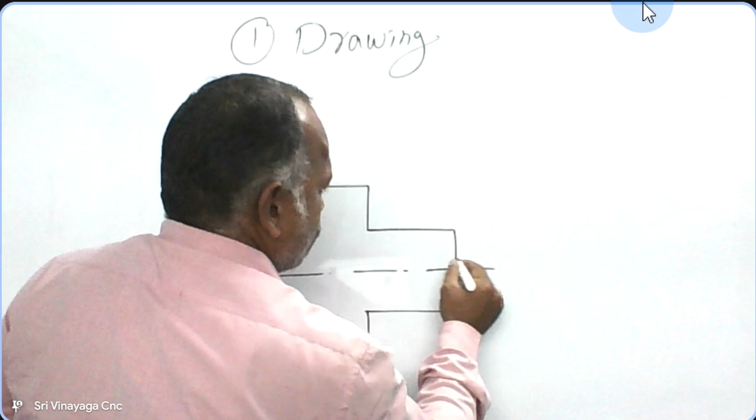Yes. Okay. Mhm. Like this.

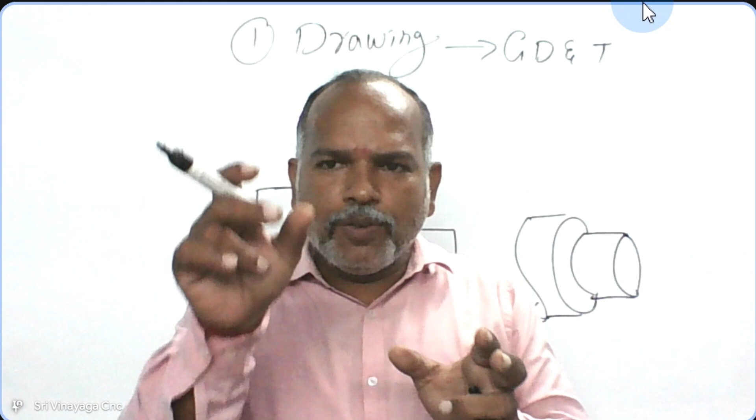Now, G, D, and T. G indicates geometry. Geometry means this lines, this is known as G. Geometrical lines, you'll be using in schooling times, you'll be saying geometrical box. For drawing, you'll be having some instruments, scale, pencil, everything - that is known as geometrical box. G indicates geometry, geometry means this lines is known as geometry.

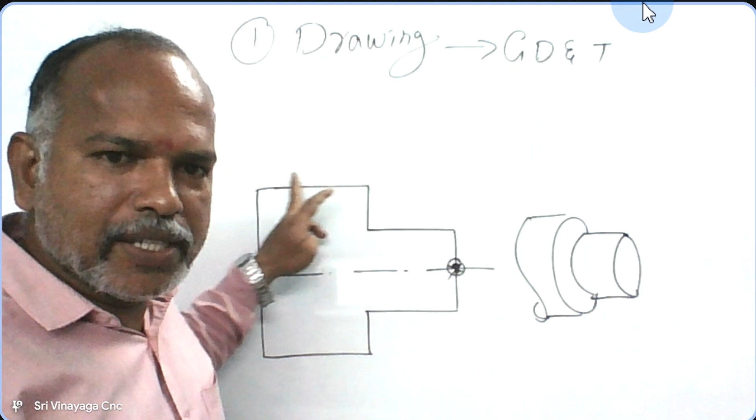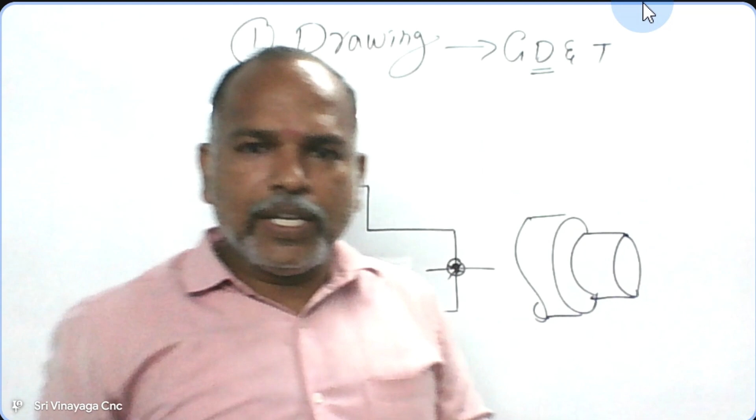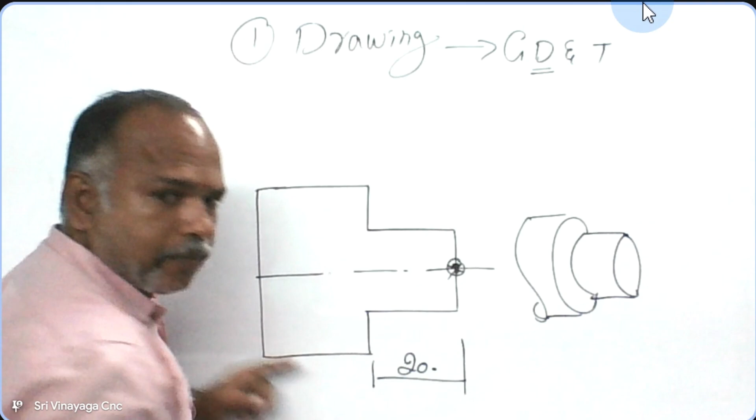Now, D. What's the meaning of this D? D indicates dimension. Dimension means nothing but... Suppose we'll write 20. This I have 15. This is known as D.

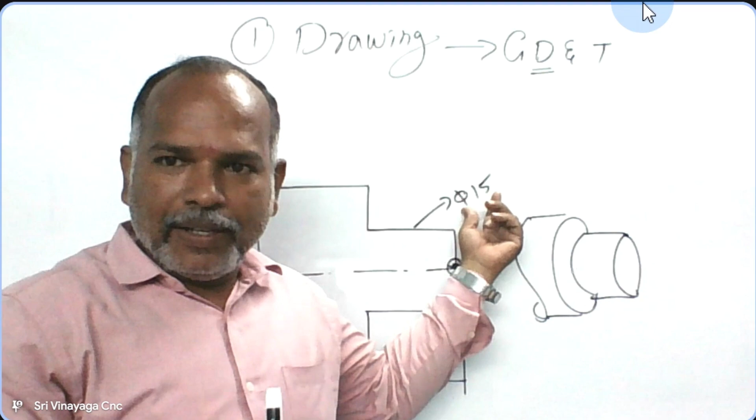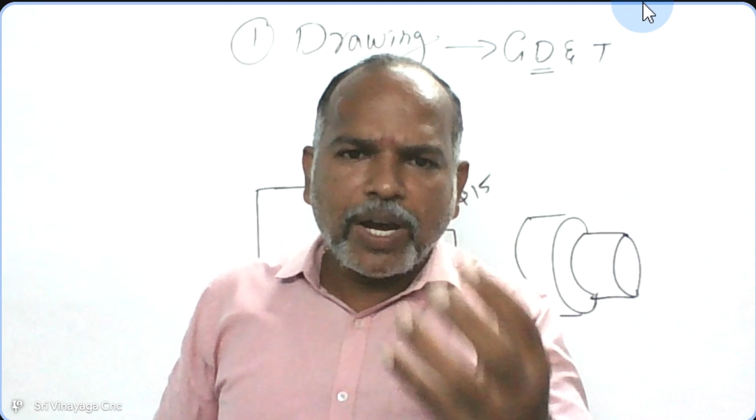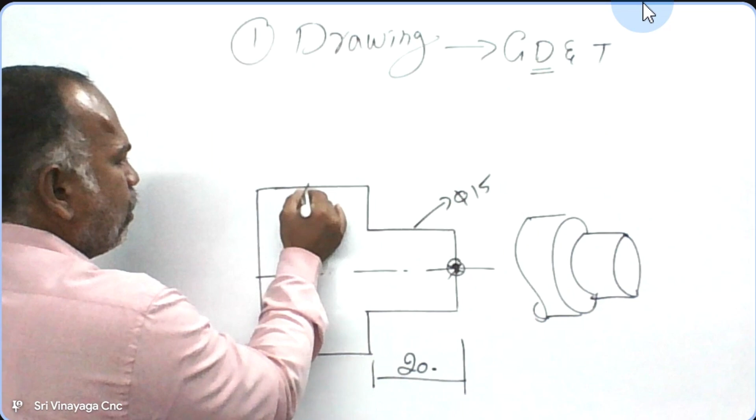Dimensions. In this engineering lab, these are three levels: geometry, dimension, and tolerance. Based on these three levels, we'll do manufacturing. If you want to do machining, if you want to do manufacturing, if you want to machine the product, you'll see these three levels now: G, D, and T. G indicates geometry, this lines, this is known as G. This is known as D.

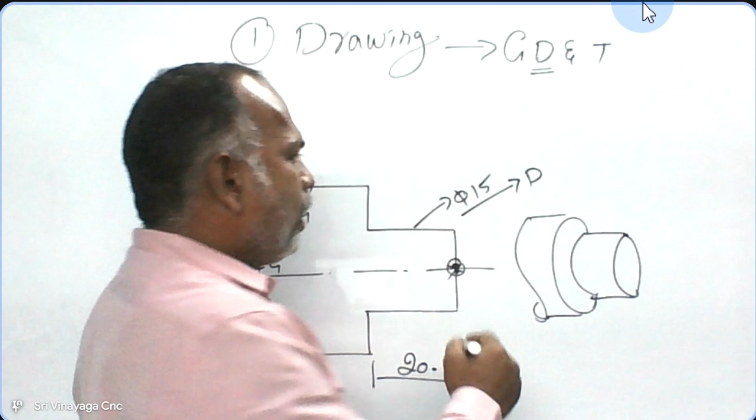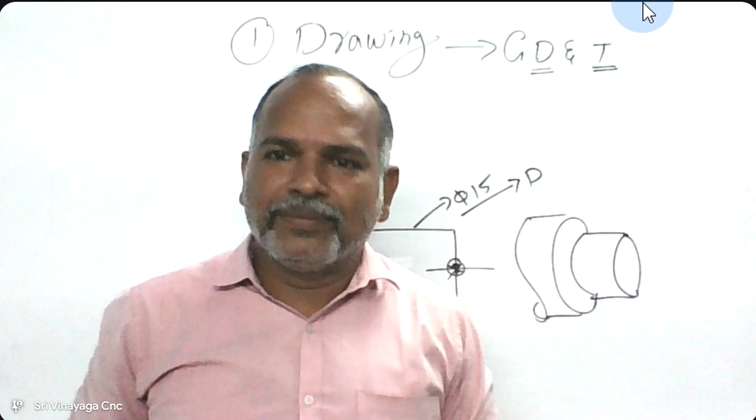This indicates D. And then this is about tolerance. What's the meaning of tolerance? It's maybe plus or minus 0.01 - that is known as tolerance. But if you want to prove 100% quality, this is important.

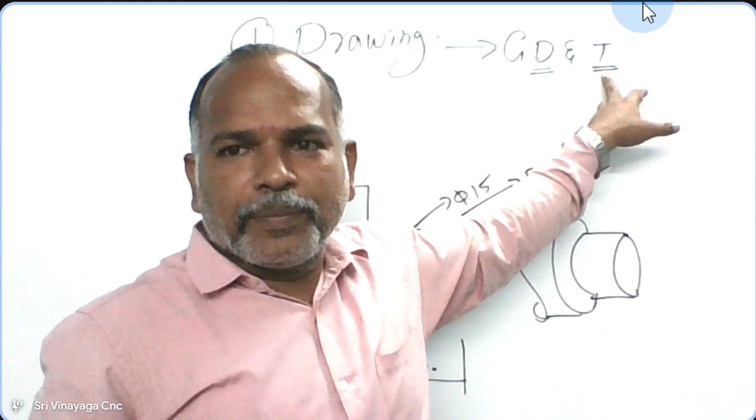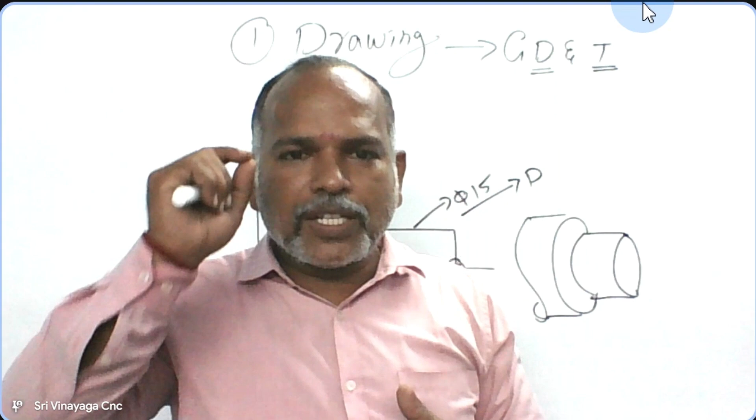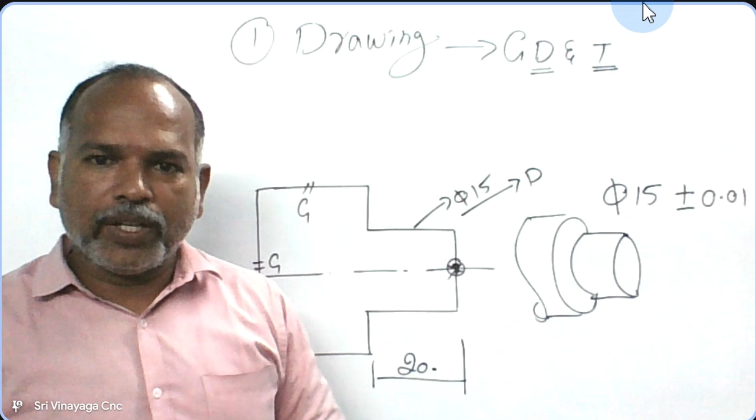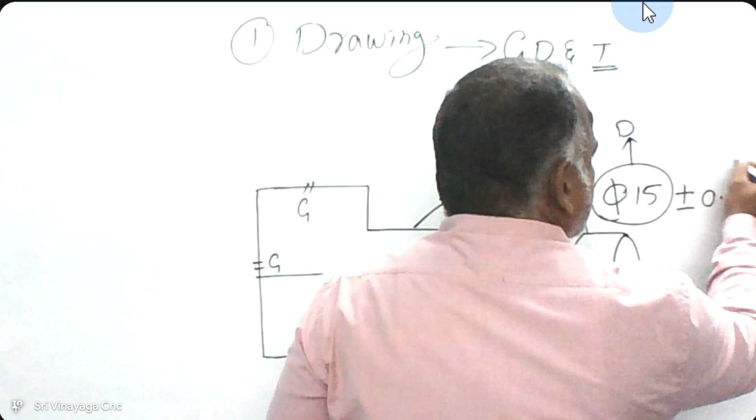If you want to develop the company, the first level is quality. As per the customer requirement, we should maintain this tolerance. Suppose this is dia 15 plus or minus 0.1, dia 15 plus or minus 0.01. Okay, this is D and then this is T. This is known as T.

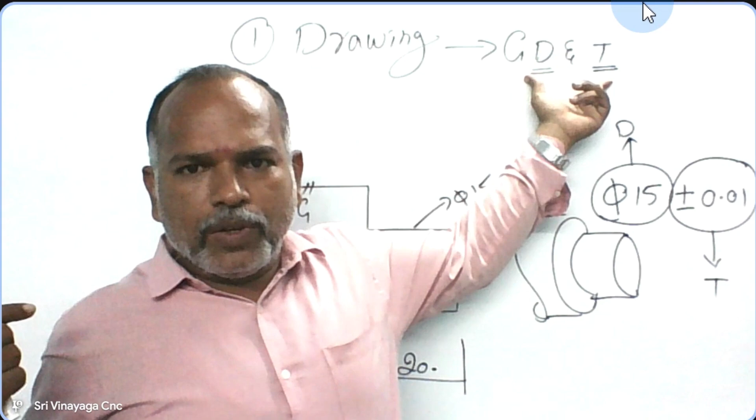This is drawing. Drawing is simply nothing but technical drawing, means it's based on this GD&T - geometrical dimension and tolerance. So before doing the program, if you want to be a good CNC programmer, we should maintain this GD&T. Based on this GD&T, the next level - in drawing level, we should see these three levels: GD&T level. Now you can understand what is the meaning of this GD&T.

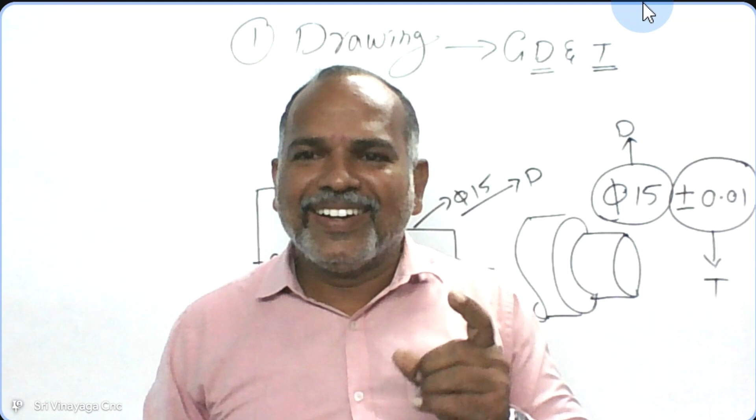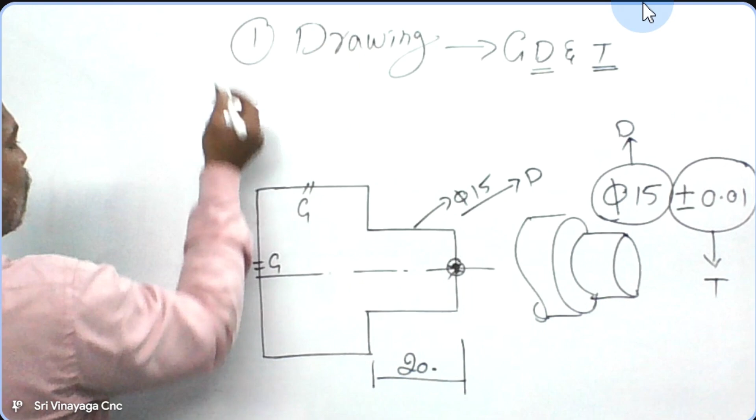Repeat, what is the meaning of GD&T? Geometrical dimension, and T is tolerance. That is known as, that is nothing but geometrical, dimension, and tolerance.

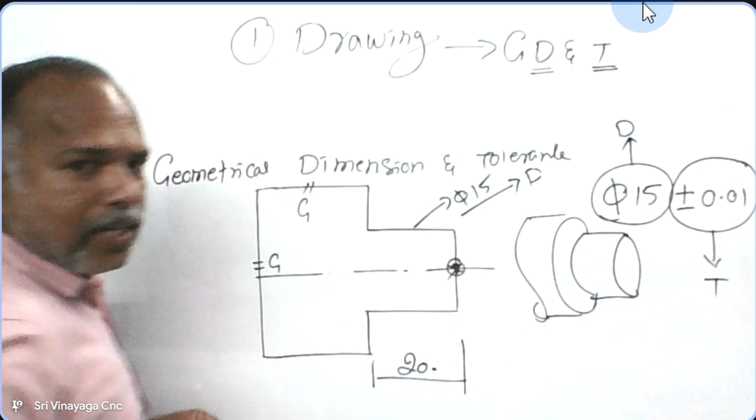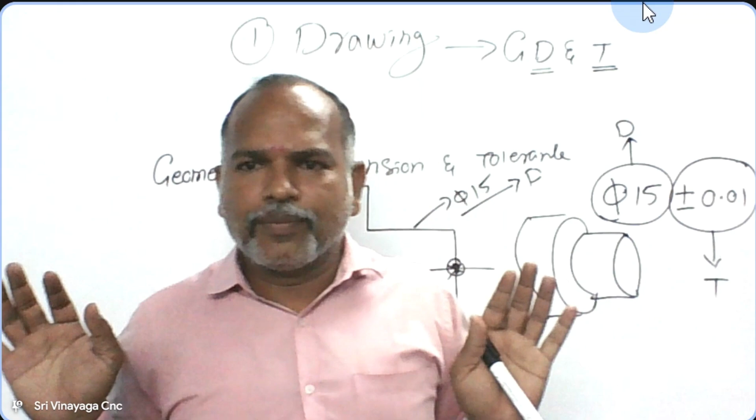This is the first level. If you want to be a good CNC programmer, the first level is we should know how to read the diagram, engineering diagram. Based on this diagram, next we will go for the second level. Now you can somewhat understand what's the meaning of this drawing.

What will be the next level? Any idea of next level? Next level, we see the geometrical dimension tolerance, and now we know about everything, now we can start with the program. Very clear - the next level is material selection.

We should have knowledge about the raw material. What kind of raw material are we using? What is the property of the raw material? Simply, just immediately after seeing the drawing, we can't write the program. Am I right? If the company has given the drawing, just on the drawing you will be writing the program?

No. Before that, first we will study the drawing. Next we will see what's the raw material. You can see the raw material on the drawing. So you'll have an idea - first we'll see the raw material. What's the raw material? If you know the property of the raw material, then we can go for the next level. Why? Because now we'll say HRC, hardness C scale. You are hearing about this HRC, Rockwell hardness C scale.

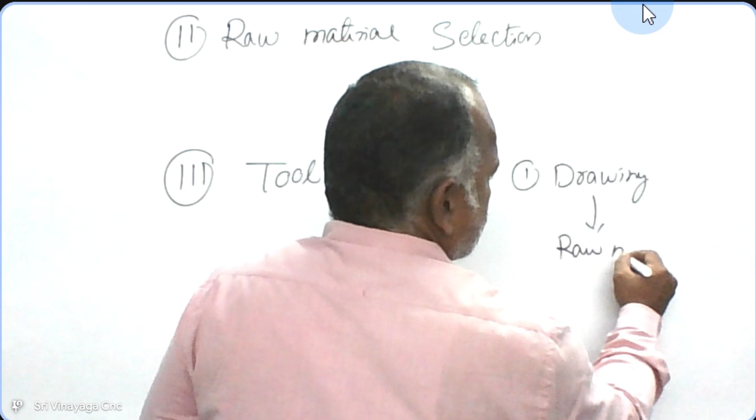Next we'll select the raw material, and then third level, tool selection. We should select the tools. But before that, seeing the drawing first, then raw material. Now you can understand.

We have seen the drawing. After completion of the drawing, we go for raw material, and then we select the operations. What kind of operation do we have to do? Types of operation. Suppose, as per the drawing, we should do facing operation, turning operation, drilling, or boring, grooving, or threading, some operations. Based on those operations...

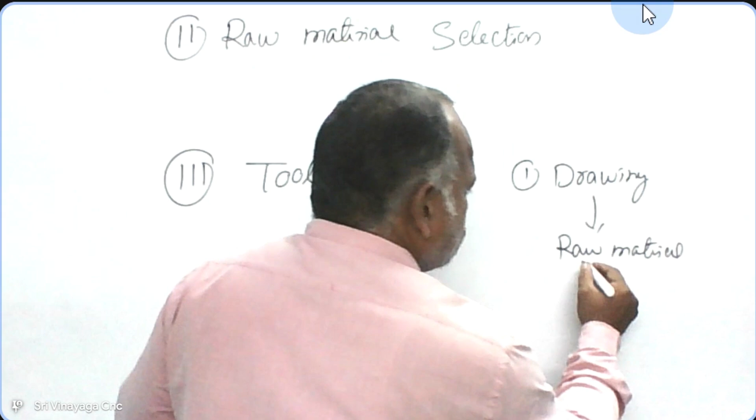For this operation, we should select the tools. Suppose as per the drawing, they say this is a facing operation and then turning operation. For this facing operation, what kind of tool do we have to use? You will be using some inserts, cutting inserts. Cutting tools - that will be end mill or insert type cutters, something.

End mill cutters or insert cutters, and then boring operation, drilling operation, threading operation, something. Based on the raw material, based on the drawing, we should select first what kind of operations, and for this operation we should select the tools. This is an important level, the third important level. We should select the toolings.

And what will be the fourth level? Maybe process, sir. Process, sequence of operation. Sequence of operation, that is everything comes under operation.

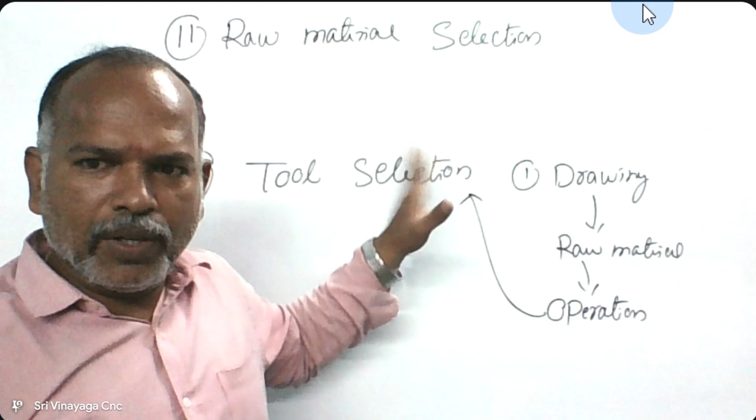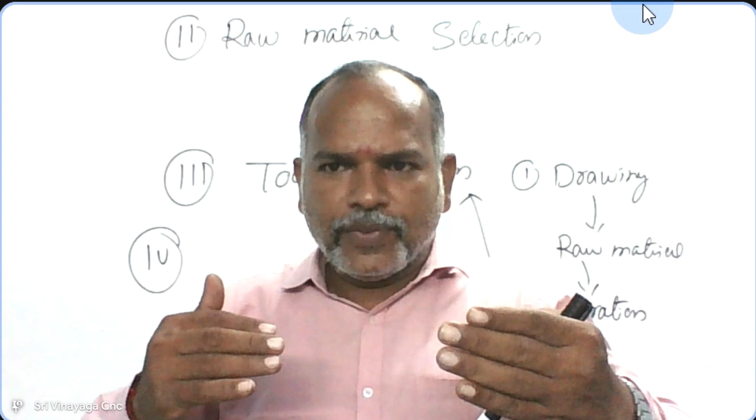Sequence of operation means level by level operations. First level we will do facing and turning, rough turning, and then we'll go for fine turning. Next we will be using drilling operation, like this sequence of operations. For that sequence of operations, now we will select the tools.

And then any other level, Suman? Any other idea after that?

Based on precision - tolerance and precision. Okay, fine.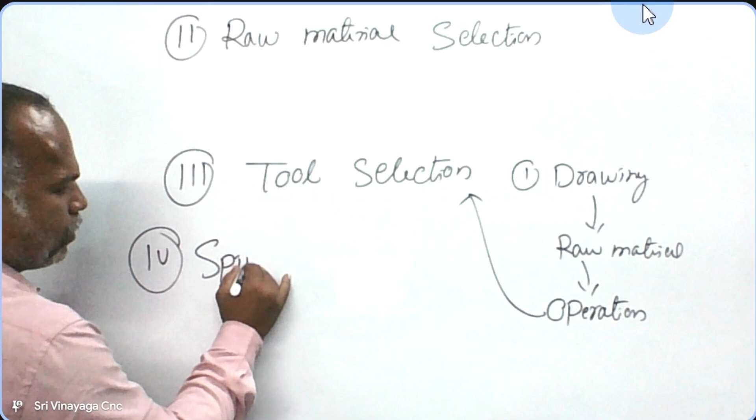That is the important level - spindle speed and feed rate calculation, spindle speed and feed rate calculations.

What is the meaning of spindle speed? We should select the RPM - the chuck rotation, you'll see the chuck rotation RPM. How much the speed? Suppose for roughing operation, we'll give 3000 RPM, and for finishing, we'll give 4000 RPM. This will depend on the operation - we'll be selecting the spindle speed accordingly.

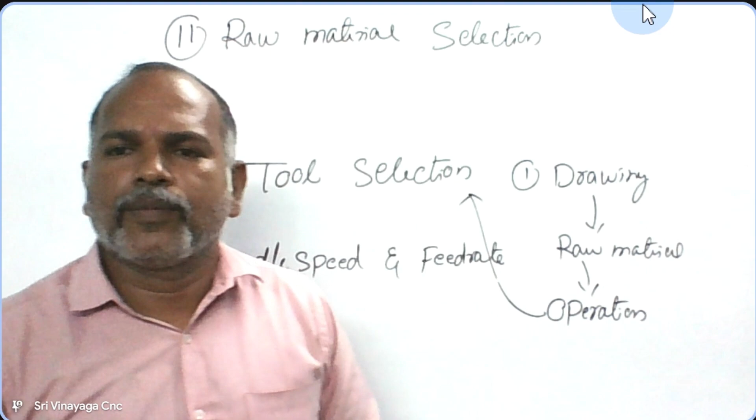And then feed rate - what's the meaning of feed rate? It is how fast you want to cut, how far the tool has to cut the material. That is known as feed rate - tool moving speed. We'll see about this tool moving speed.

This is workpiece rotation. As per the lathe machine, the workpiece will be rotating - the chuck will be rotating. This is nothing but the chuck, say, the speed in spindle speed. Here we mention, suppose 3000 - this is RPM.

RPM means revolution per minute. Okay, 3000 approximately I am saying - 3000 RPM, 4000 RPM, 5000 based on the machines. And then feed rate.

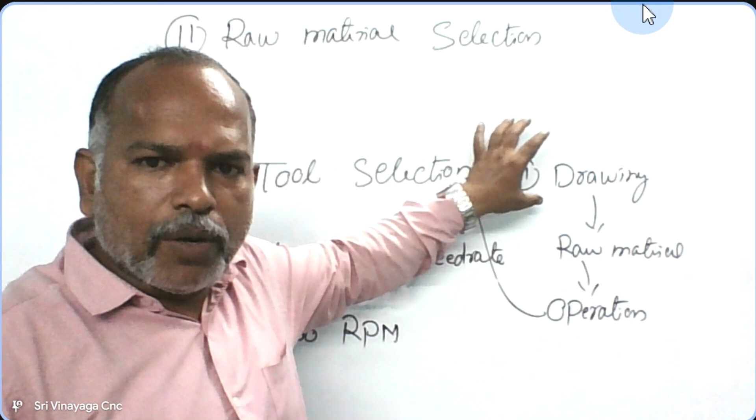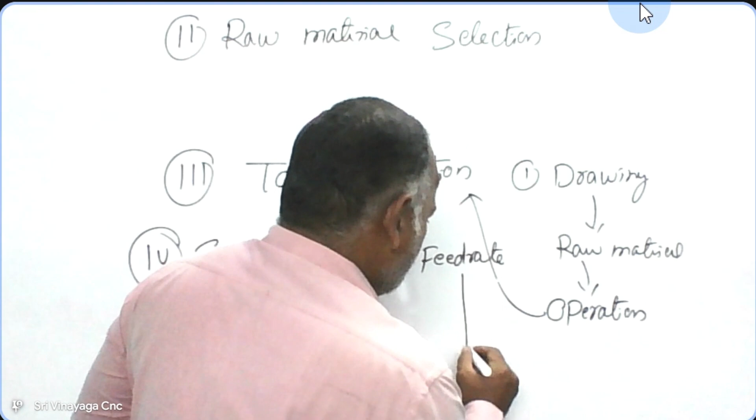Feed rate means tool moving speed. This feed rate and spindle speed will be based on these three levels: drawing, raw material, tool selection. Feed rate as per the lathe machine - as per CNC lathe machine, we'll say mm per revolution. Unit will be millimeter per revolution - that is the unit of feed rate.

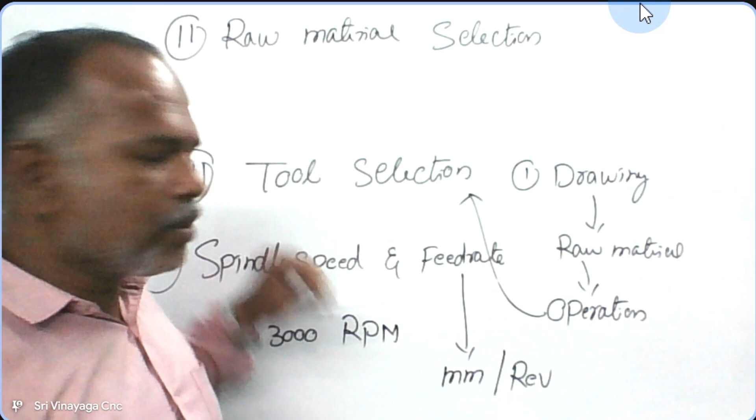And then spindle speed - these are the four important levels. First, if you want to be a good CNC programmer, we should have knowledge in drawing, raw material selection, tool selection, spindle speed and feed rate calculations. Now we have seen the four levels - what will be the fifth level?

Fifth level, I think we have to know our starting point. We'll start the programming, typing the G code and M code, or know where Z0 is. We have to know where. Before that, we should set the component.

Setting - just nothing but how to hold the component. We can use this chuck or we can use the tailstock - something will hold the component like this. First we should decide about that, because based on this job holding, we'll do the operations.

Example, if you have knowledge of milling, there are different types of job holding devices - chuck, you'll be holding the job component in chuck, or otherwise clamping in fixtures, or some other pneumatic controller will be holding the component - with the help of air pressure it will be locked like this. Different types of job holding devices will be there in CNC machines.

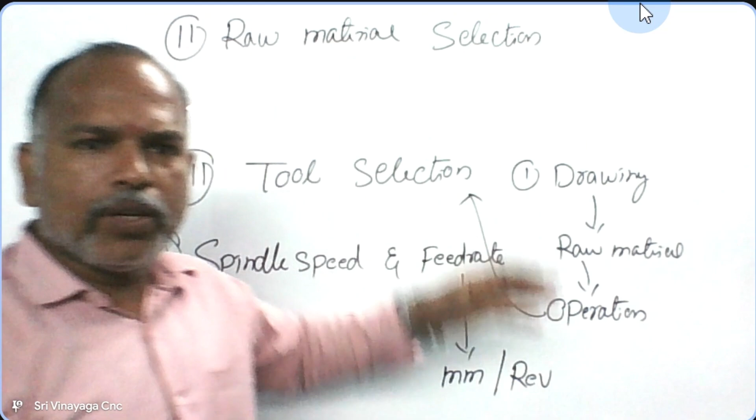First we should have knowledge about the setting - the fifth level. In CNC machines there are three levels - what are the three levels? First level: operator, setter and programmer.

Operating - Suman, am I right? Yes sir, operator setup. Now you are in which category? I'm actually a designer - I want to know, I'm actually a design engineer. Oh, okay.

These three levels: operator, setter, and programmer. For operating, it's just loading, unloading the component, pressing the green button - Richard sir, am I right? Yes sir, you're right. Operator category is just loading the component, cycle start, after completion unloading the component, once again fixing the new component, cycle start.

That's all. But if we go for setter level, the second level will be setter. For the setter level, this setting is very important - without knowing the setting you can't be a setter. For these settings, we'll say geometrical offset, work offset, radius offset, wear offset - these are types of offsets.

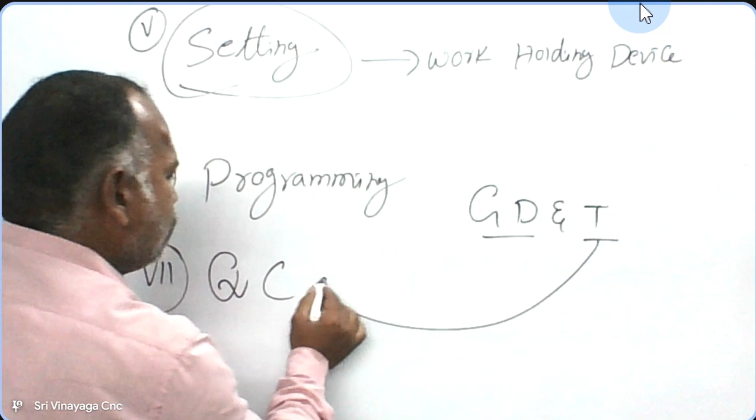The 7th level is QC - quality control. That is what I'm saying about GD&T. This is related to quality control - tolerance. As per the tolerance, the product is there, and we should check the quality control.

These are the 7 important levels to be a good CNC programmer. If you are thorough in these 7 levels, you are set - you are the best programmer in the world, not only in your country, but in the world.

Yes, you can do it. Maybe, you can try it. No problem - if you follow these 7 rules, after 2 or 3 years, I don't know, Richard will be the best programmer in the world. Is it? Maybe. So we should follow these rules.

From tomorrow onwards, we'll see the GD&T - the properties of the raw material, the properties of tool selection, spindle speed, feed calculation, everything step by step. We'll go through the class.